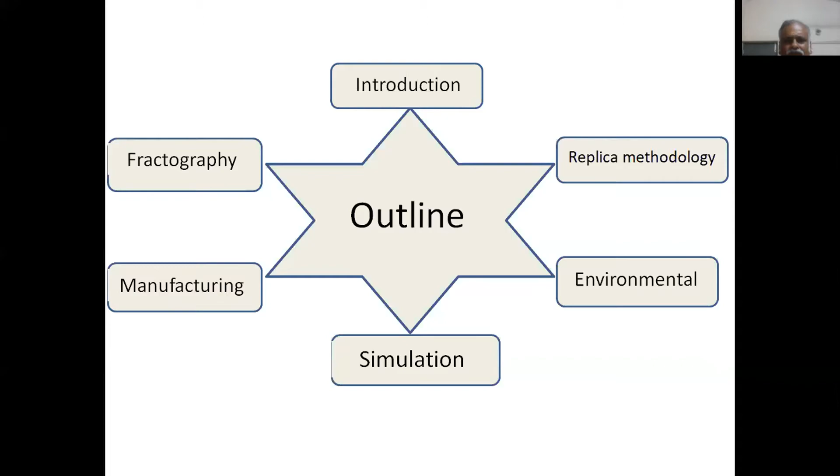Why do we study materials? We all know that material solids have a very stable form. For the time being, let us forget the other two states, liquid and gaseous. We know that solids are made of atoms, ions or molecules, which are sitting in a well-defined fixed structural arrangement in space. Therefore, we consider them solid.

However, they are not solid in that sense. They do fail. If you take a cube of glass and a cube of steel and drop them, the steel will remain intact, the glass will fail into pieces. Why does this happen? There is something that what you see with your eye cannot explain. This is the most important point.

And there lies the structural arrangement you talked about, that they are well defined. There is something there. This is because there are defects present in several dimensions in this material - right from zero dimensional, one dimensional, two dimensional, three dimensional defects present in the materials which you do not see with your eye - that is actually posing the trouble and making it fail. Many engineers do not know this, but metallurgists will appreciate it easily.

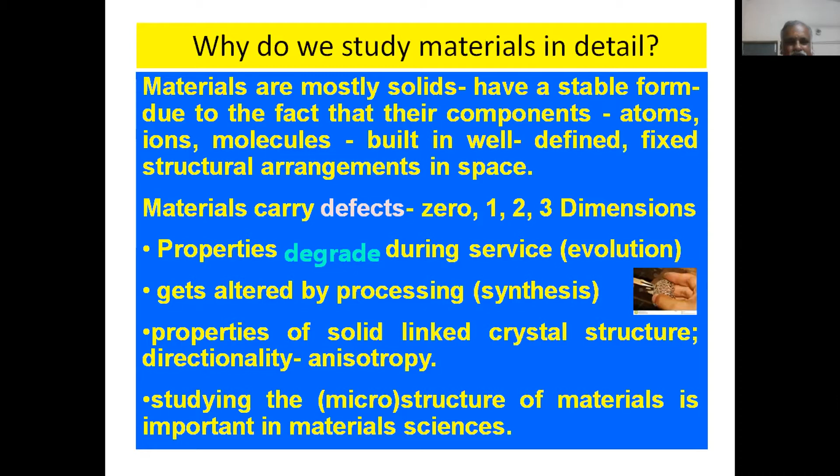Defects can be classified as zero-dimensional. An example is point defects. Metallurgists should recall that point defects are nothing but vacancies in the lattice or an interstitial atom present inside. If you take one dimension, metallurgists will immediately say dislocations, but mechanical engineers do not know this.

Then there are planar defects, which are the grain boundaries. Dr. Murthy spoke at length about casting, and these grain structures develop during solidification, forming boundaries. These are all planes, and therefore the planar boundaries are planar defects.

Volumetric defects were mentioned by previous speakers. Matthew told about inclusions, and you cannot melt steel without inclusions. Cleanliness is a word used, and metallurgy students surely can appreciate what cleanliness means. Dr. Murthy also mentioned that volumetric defects mainly are inclusions and of course voids and porosity. These two you should also remember.

Those who work in our nuclear environment appreciate a nano void, and it is very important for them because during irradiation, the material in a reactor gets a lot of point defects, generated as vacancies and interstitials. These vacancies can come together to form what is called a void, and in the void there will be some gases generated during irradiation. Therefore, void swelling is a major problem for mechanical engineers in our center. They know void swelling, but they have not seen the void; they have to see it only through a microscope.

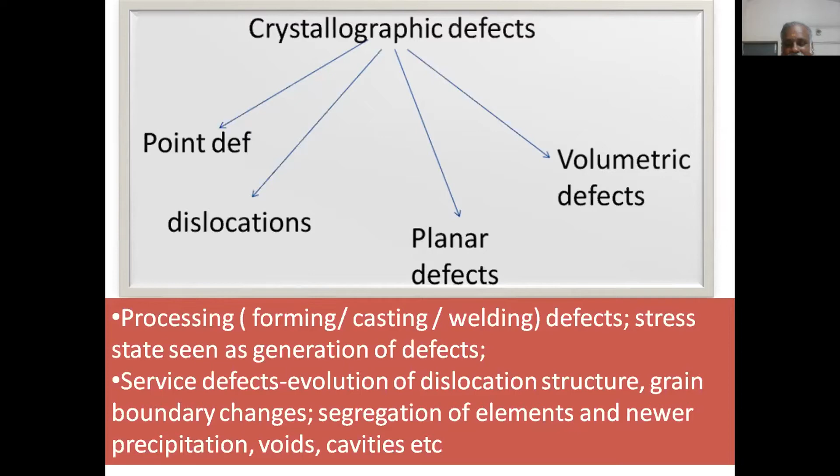Although engineers design well, and almost all components are designed very well, they fail or break because there might be an applied load they did not anticipate. As previous speakers also told, if there is a weld, there is a residual stress. Dr. Murthy called residual stress a silent killer. Yes, silently it sits inside the component, adding further stress to the applied stress, and therefore the material can give way.

Or some service factors like corrosion can cause the material to suffer stress corrosion cracking. Vibrations are another additional source of stress, and of course this is the service environment.

Look at some of the cracks which people ignore, the NDT people, even though they do an NDT scan of the weldments. The weldments are critical places in a component, and these cracks will be lying very low, and engineers will say this can be allowed as per their design permissible limit, but they will grow as a function of time and crack, as Dr. Matthew also highlighted. Forming defects, I think you would have read about in the data book, so I am not going further into detail.

As a function of time, that is evolution, local microscopic changes in composition can occur in high temperature service, particularly in an environment of 500-600 degrees, in components that serve in reactors or steam generators, where diffusion changes will make changes in the microstructure, making precipitations possible. Therefore, it will induce defects or the formation of a crack to extend further. So do not undermine the importance of microstructure, which is the theme of my talk today.

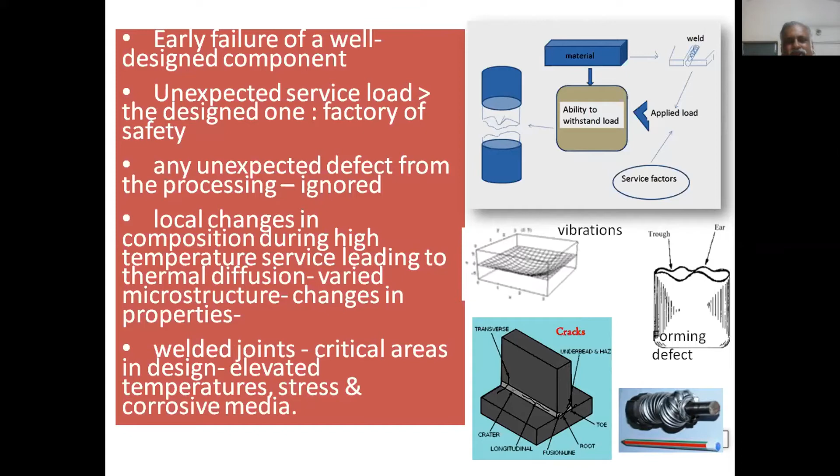Is there a possibility of R&D from failure analysis? Yes. When there are premature failures, engineers get puzzled, and sometimes catastrophic, unsafe events occur, so it is very serious. At that time, you need a systematic study of microstructure and properties, and this is what is called structure-property correlation.

This is very important for our failure analysis. So understanding properties in terms of what? Temperature, stress, radiation dose in the case of a nuclear reactor. Temperature and stress - Dr. Matthew spoke at length about low cycle fatigue and creep.

Temperature alone means what? Thermal aging. If it is stress and temperature together, it is called creep. In the case of radiation dose, it generates a large amount of defects - number of vacancies, number of interstitials are produced. So precipitation, which you may not have thought about, will occur in our reactors in an unconventional way.

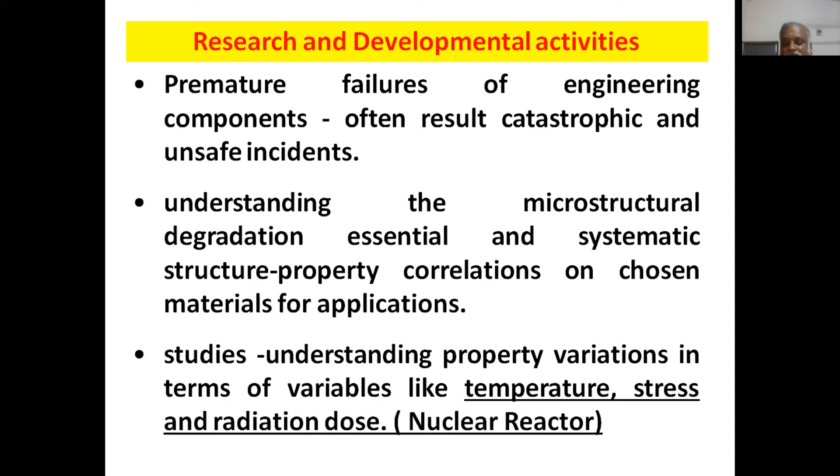Going further, today in this talk I would be touching upon a few very small components. Most of the major components, let us assume, are designed very well. Minor components may have been ignored - for example, a bellow, a tube fitting, or a manifold.

Most of the reasons have already been listed at length by Dr. Murthy. I would put as one reason the choice of material - the designer would have specified one, but it is not available, or you want a cheaper material, so you ignore it and use another variety. Let's say 316 is specified, but 304 is used instead. That's not correct. Then there are process-induced defects.

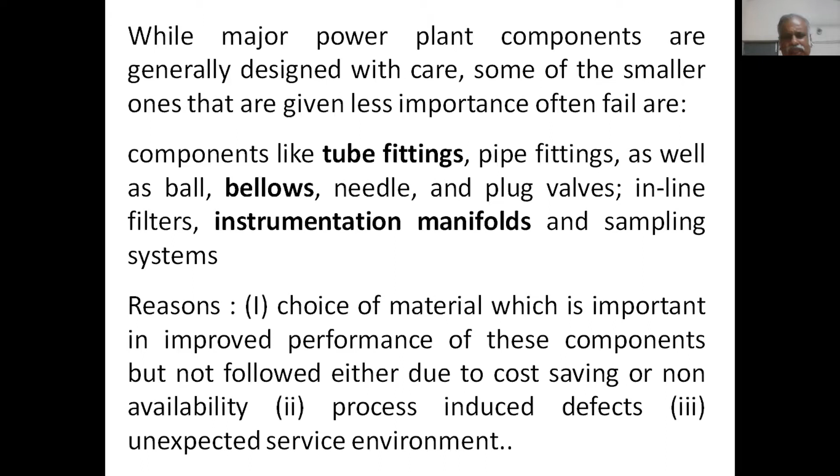During the process, there might be some defects introduced which people ignore. Unexpected service environment - that means vibrations can occur, or residual stress may be present. These things will surely affect the component. Corrosion can also affect it severely.

Let me go into the next slide to find out what failure is. There are several definitions given by previous speakers, and this slide has shown it earlier too. The main point here is that failure means cessation of linear elastic behavior. A material which behaves elastically, when deforming, will come back. If it goes into plastic deformation, it will not come back.

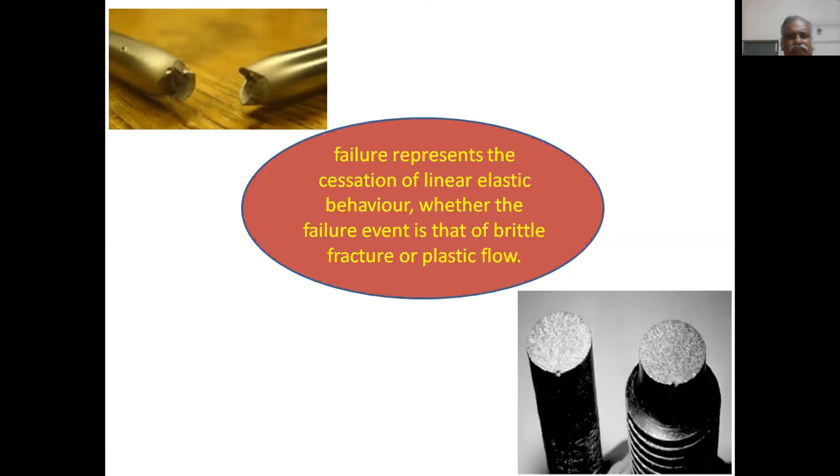Therefore, failure means - for a mechanical engineer - linear elastic behavior is very important, and this is the important thing for fracture mechanics. On the other hand, a material need not deform, but it can break into pieces like brittle fracture - that is limited plastic flow. I think Dr. Matthew had given this. So remember this important definition: cessation of linear elastic behavior is defined as failure for mechanical engineering.

Let us go into failure analysis here today. I would be employing two things - what are the tools? I think there was a chat message about this. Two important tools: fractography and metallography. I would be using these two, and these are the eyes for me to understand the failure.

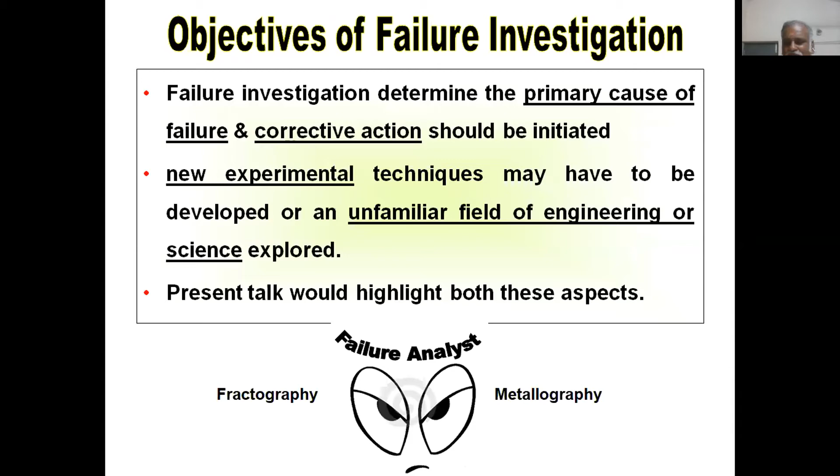Let me go further - what is fractography? How do you see that? You can look at low magnification or simply with your eye on the surface of the fracture, or use a microscope. If the component is very big, like a turbine blade, go to the site and take a plastic replica.

This method you can learn. If you are able to associate with a laboratory, like Dr. Murthy's laboratory, or Indira Gandhi Center, or NAL or DMRL, for a month or so, you can easily study a case, and the replica method can be easily understood. Using a microscope you will be able to see them, and you can section them at the backside of the fracture surface and see the metallography through optical and SEM. Therefore, cross-sectional metallography will help.

People will wonder why I'll talk only about microstructure - what is the implication on the property? The only important property for people like us is micro hardness. Although there are a variety of other properties like tensile and others, you can measure micro hardness or hardness, and this will give you an idea about toughness and also about strength.

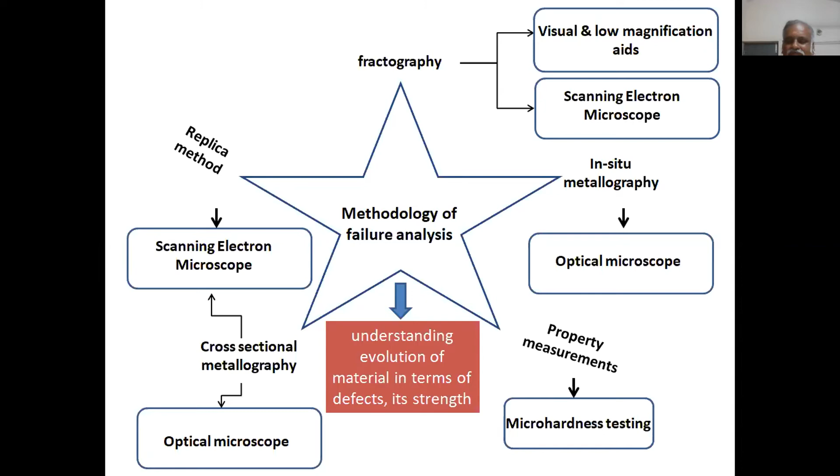So very quickly you can get to know the properties around the vein region, and what kind of microstructure it is - whether it is the same as the distant area, or similar or different. Once you establish these things, the cause can be understood.

For example, I talked about defects - this is a valve stem. On the left side you have seen a stainless steel valve stem, highly deformed. What are the signatures? You can see different signatures. One interesting signature - the very parallel lines - suggests that this supports severe deformation twins, and slip bands are also there.

They are interspersed along with this - so twinning as well as deformation by slip. Slip is very common for stainless steel, but twinning indicates that high energy deformation has also occurred. This is one suggestion you get, and these are all two-dimensional defects that are generated. If you look at a stainless steel that is deformed, you can see beautiful dislocations - one-dimensional dislocations. This is a transmission electron microscope picture.

You see the dislocation is random, whereas in this band it is all arranged. Along this band you find a large amount of dislocations, and dislocations from here can interact with each other and get into a confused state, giving what is called a debris of dislocations.

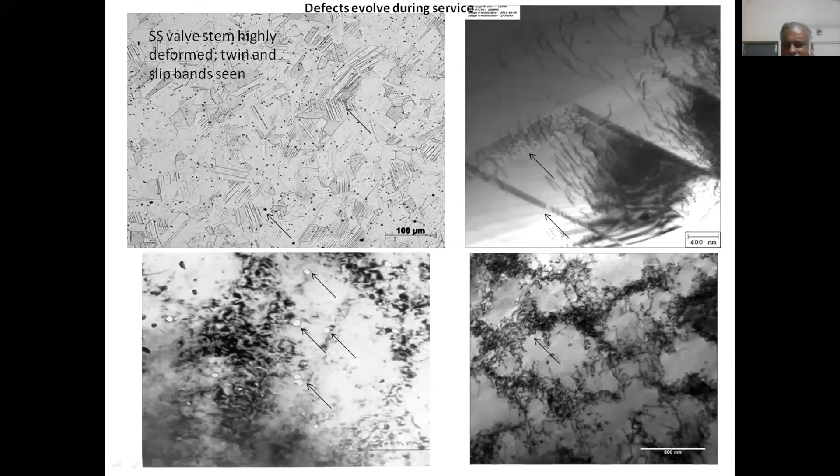On the right corner you find dislocations form what is called a cell arrangement. This is the formation of dislocations when, to reduce their energy, they try to form a network like this so they can stabilize themselves. This is a case study from a low cycle fatigue sample where I could see the dislocations rearranging into cells.

If you look at the left side, this is a reactor component, a stainless steel component which has served very well but got exposed to irradiation. Irradiation basically generates vacancies and interstitials, and the vacancies agglomerate over time, evolving into voids. I can show you these nano voids, which can be seen only in TEM.

These white dots are basically voids. How do you say it is voids? A person who has worked in a transmission electron microscope knows that electrons travel through the sample. If scattered, the image becomes dark; if they pass through, it becomes white. So dislocations get scattered and appear dark in the previous pictures, but here the round ones are voids, which allow electrons to pass through, making the image white. That is how you distinguish them.

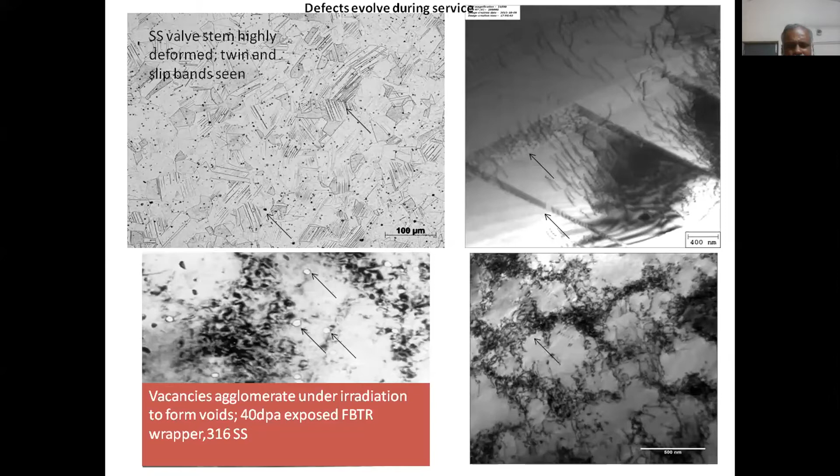Okay, let me go into the next one.

This is a classic example of grain boundary migration in a creep-exposed sample, as Dr. Matthew was speaking about. This sample served for 30 years in a reactor environment. When it came to me for failure analysis, I could see a number of precipitates around the grain boundary, a triple point, and several precipitates that had fallen. Actually, the grain boundary has migrated here. This is what is called grain boundary migration due to creep.

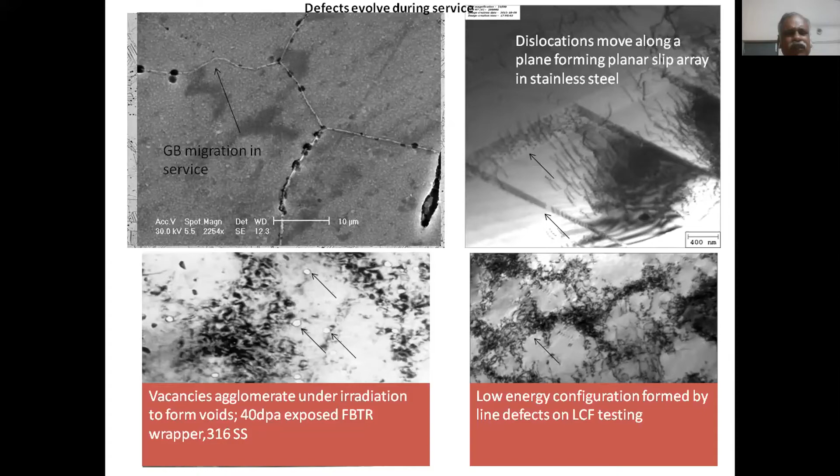All these things you can understand if you have a very good eye for microstructure. Now let me go through these case studies.

Let us first have a case study by fractography, that is, seeing only the fracture surface. People who spoke before me talked about ductile failure and brittle failure. What is the difference? Cup and cone for ductile, as Dr. Matthew told, but brittle failure is shiny. The light gets reflected and it will be flat.

What is so important about ductile failure? Take a turbine blade as an example: if it extends even by a fraction of an inch, that is sufficient for it to touch the surface of the dome. So if the material elongates, it limits the service life. That's why turbine blades are designed for about 1% strain. So you should specify certain important properties, like ductility, for a case such as the turbine blade.

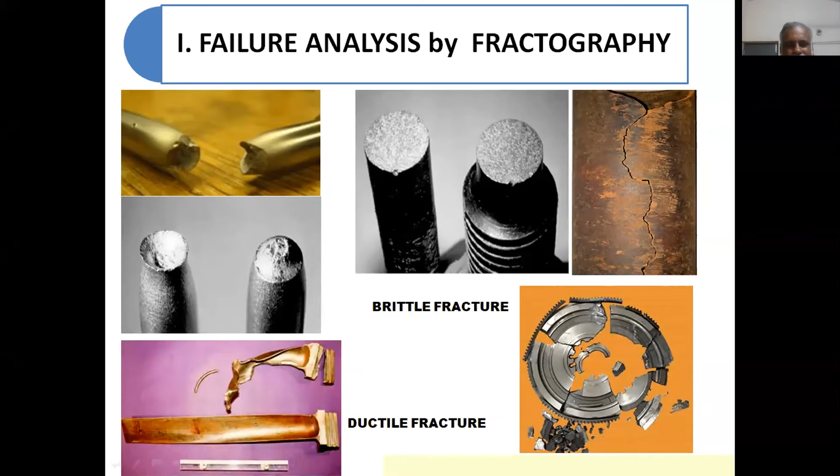Let me go into the case study with the given samples. This was basically an extrusion. On the left side I have marked region 1 and region 2; this was cold extruded or forged. When driven through a die, it came out in pieces like a crocodile mouth. If you look carefully with the naked eye, you can see some signatures on the right corner down here, these lines.

A good fractography person will understand that this is basically a brittle failure. The shininess on the surface, plus the lines, suggest it is a chevron or V-type pattern, meaning it has failed by brittle nature.

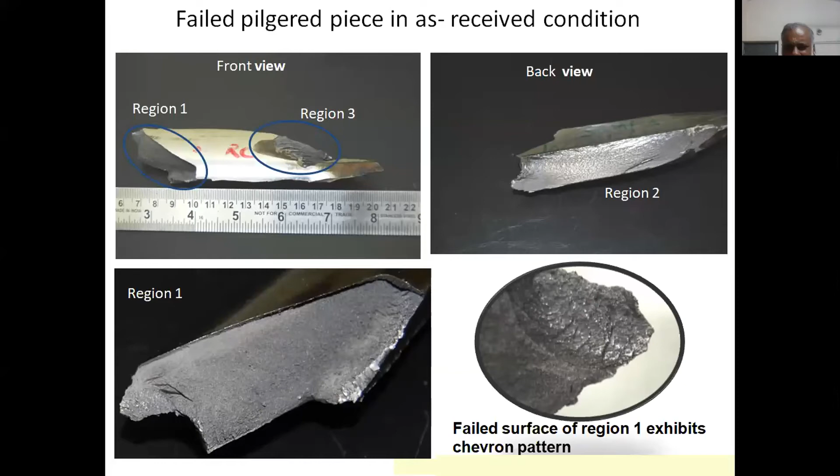If you put it under the microscope, the fracture surface exhibits beautiful grains. I have not done anything to this, but you can see beautiful grains, and the grains are elongated and oriented. That means it has suffered some deformation, and all the grains are flat.

Certain grains exhibit slight differences, some small regions where something is present. In order to understand what is happening, I increased the magnification from 80x to around 300x. You can see that certain grains are flat, but certain grains contain some amount of deformation, suggesting that a little bit of deformation has occurred, plus grains are flat and cleaved away.

So this is what they have used a term called cleavage. Cleavage facets are seen, and Dr. Matthew mentioned inclusion. See the beautiful inclusion sitting here, at the corner of the grains. They allow the material to give away like a pancake, and it comes out as brittleness with very limited ductility.

I also mentioned fractography and cross-sectional metallography. Beneath you have two pictures exhibiting the cross-sectional metallography. What is cross-section? Very close to the fracture surface. Slice it, polish it, etch it, like what you do in your metallography laboratory. You will see under the microscope beautiful grains, and the grains are decorated along the grain boundary with a lot of precipitation.

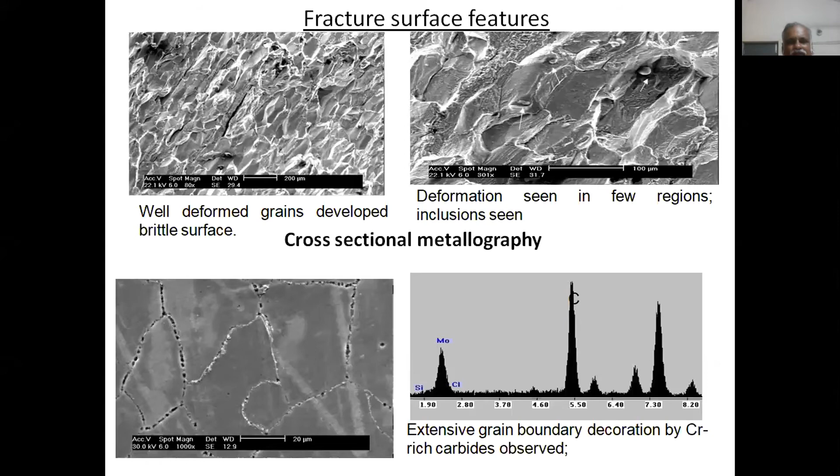Now I would go into the second case study, where metallography has helped to understand a failure of wire rope. An aerial wire rope is employed in our heavy water plant to transport coal from Singareni to Manuguru. This is supposed to serve for 6 continuous years with regular maintenance. Then the rope has been working nicely.

But however, every month there is a breakage. So there is a consideration, because the tons of coal being transported along this rope for 9 kilometers across the highway is causing danger to the people who are traveling. Therefore, a serious concern was raised and the failed parts were given to our center.

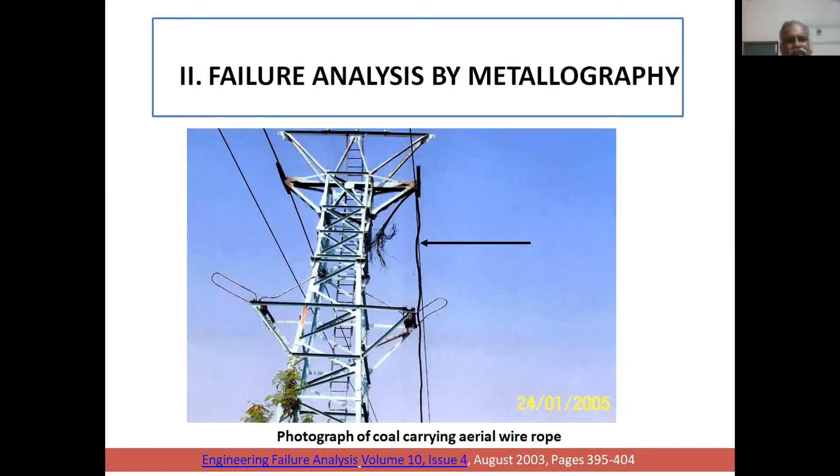The rope is basically 64 millimeter diameter and consists of several rounds of fine round wires cross-section wise, and the last 2 outer sets are basically locked coil wire in the form of a Z shape, so that they can lock each other and therefore be tight. But it is this Z-shape cross-section wire which is actually failing.

How is it failing? It comes out. When it comes out, the bucket which travels will get stopped, and after some time it tumbles down and it is dangerous. So therefore, we were given this failed piece.

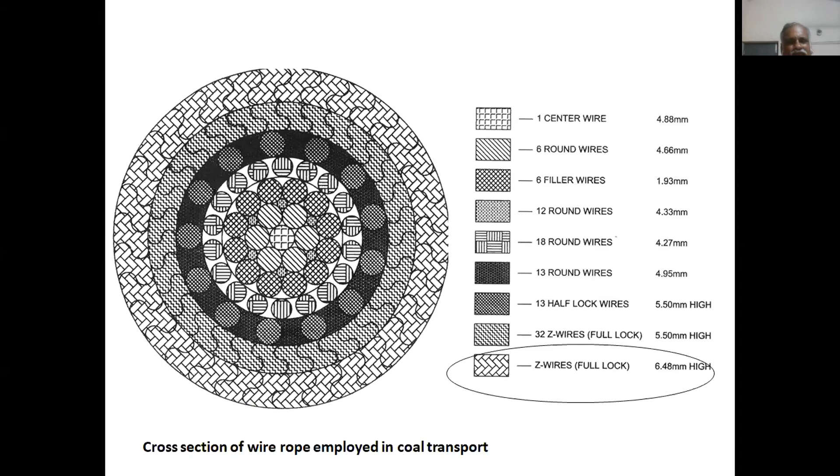If you look at the cross section of the Z wire, it's basically 0.7% steel. You know, 0.8% carbon is 100% pearlite. For 0.7, calculate 0.8 minus 0.7 divided by 0.7, which is about 1/7. That 1/7 will be ferrite presence. So you find that it should be 1/7 ferrite stringers with pearlite and other things, or 6 by 7.

But if you look at the edges, you find the structure is different. Microstructurally, the probe exhibits on the outer edge, up to about 25 microns, a different structure. I have shown the micron here and you can see the width measured. The structure is around 50-50, that is 50% ferrite, 50% pearlite. That means it is 0.4% steel.

But basically, this is heat treated, and instead of 0.7% here, the edges have got removed of its carbon. What is it called? Metallurgists will immediately say it is decarburization. If decarburization is present, you will lose the carbon. If there is a carburizing environment, then it will become carburized. But this clearly shows that decarburization has happened.

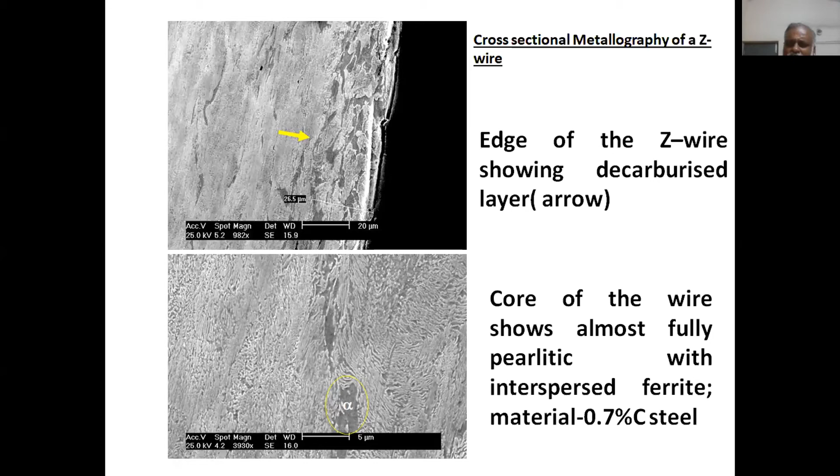So I have further continued and shown the mechanical properties, how it is. You can see clearly that a hardness map across the thickness clearly shows that the edges exhibit 200 VHN compared to the core, which is basically around 400 VHN. Correct? So that means what?

The decarburized layer, as any metallurgist can appreciate, is basically a soft zone compared to the core. Is it good? The American Association for Wire Rope accepts this, but we argue that it is not good for us.

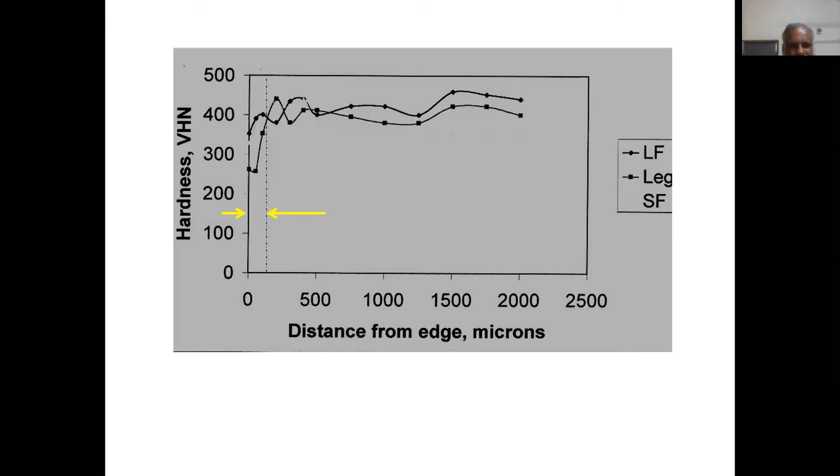How? It's very simple. The buckets move, there are about 300 buckets, and a particular zone is decarbonized. That wire gets hit every 20 seconds. One bucket moves, and that 300 ton load, when it sits, it gets deformed. This deformed pearlite will get work hardened as a function of time, and we could see that the hardness of the edges goes high, becomes brittle, and breaks over a period of time. This is what we argued.

Then they argued how it is possible. The wire gets decarbonized when it is heat treated after manufacture. So what is the atmosphere in the furnace? The atmosphere is basically generated from propane gas, which when fired converts into CO and CO2, whose proportion determines whether it is carburizing or decarburizing.

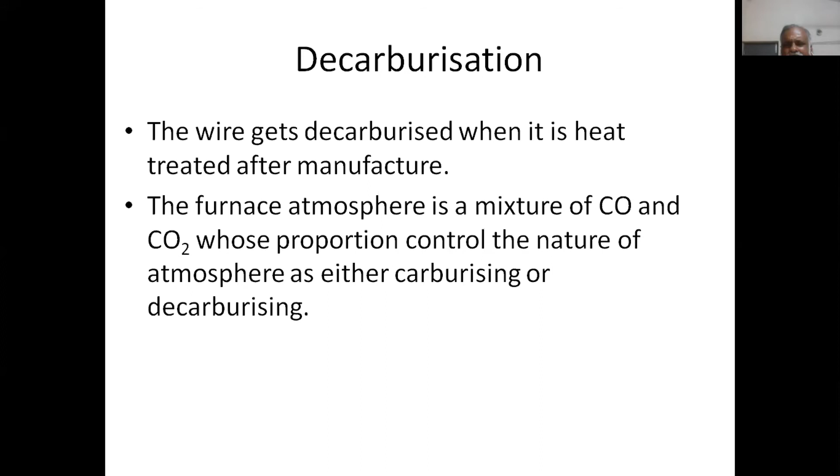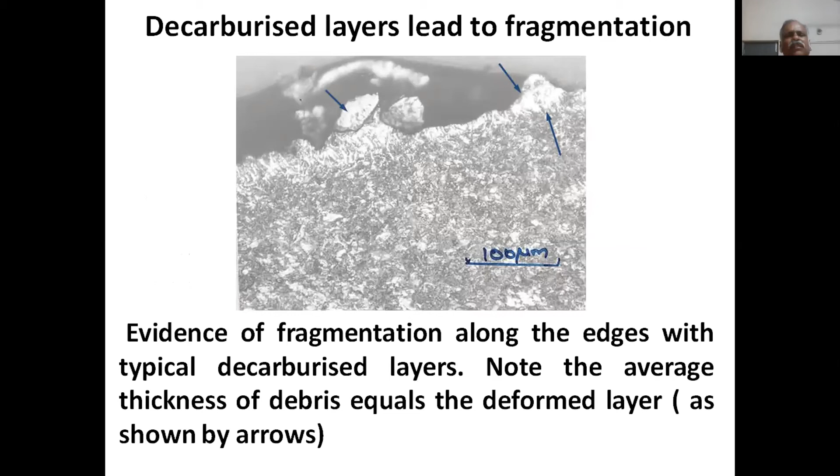In fact, the decarburized surface has become hardened, as I have shown in this microstructure. My argument is the fragmentation along the edges clearly shows that the decarbonized layer has been hit again and again by the 300 buckets every 20 seconds, leading to a deformed layer becoming very hardened, and hence losing its ductility. So decarbonization should not be permitted. This is how I argued.

That CO and CO2 combination, how it should be, is very nicely portrayed in good books of metallurgy. You can go through that, and whatever I have spoken is available in Engineering Failure Analysis as a paper. Okay, for want of time, I will move further.

The second one is where solid interacts with liquid and gas, and this is why environment plays a part. In our case, sodium and water are both present, and they travel. Water travels in the form of steam, and sodium is hot liquid. Okay, and how this interacts and what kind of failures occur.

One is caustic embrittlement. This is a form of stress corrosion cracking. Several other corrosion methods like stress corrosion cracking, pitting, hydrogen embrittlement are all possible in our environment. For example, steam, chlorine, hydrogen are possible causes.

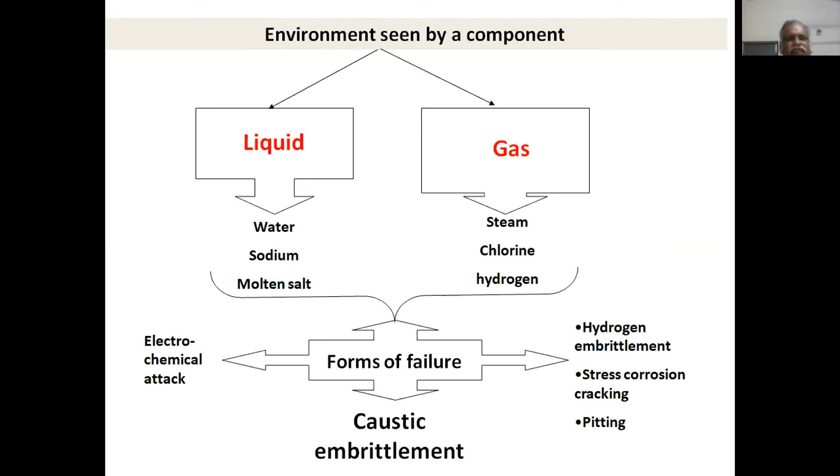So I would try to touch upon two case studies and close. The most critical component in our sodium systems, the liquid sodium system, is the bellows.

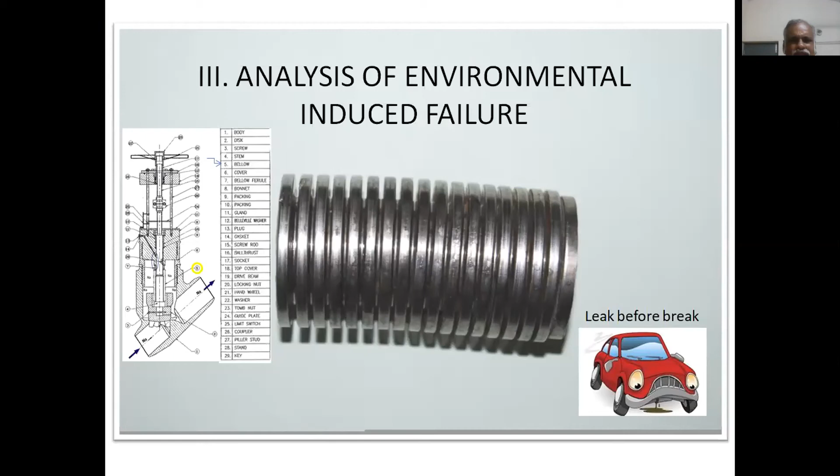When the bellows develop a small leak, we have to shut down and take it out. Once it has leaked, the material has been lost, and it is very difficult to understand how the leak has occurred. We have to carefully see. In this case, I have given a bellow. The bellow consists of two ply material, two sheets, in a folded construction.

I could see that it has given away and opened out for a 3 millimeter or 2 millimeter hole, and one lip alone was there. There are some interesting discussions. If you look very carefully in detail at this fracture surface, around 1000x magnification, it shows some lines, a beautiful set of lines. Further magnified, you could see beautiful striations in addition to a twin here.

So that means there is some kind of interaction which is exothermic in nature. All of you know from 12th standard that sodium, when it interacts with water, is exothermic. In fact, sodium is liquid by 90 degrees Celsius, and when steam interacts, sodium plus steam will generate a huge amount of heat, and it can reach 800 degrees in no time.

This will generate and open out a very fine thin bellow material, and if a defect is present, it will open out, and through that interaction causes Wallner lines, which are basically microscopic lines. In detail, if you look at it, you find development of twin bands along with a lot of striations, suggesting there is also a fatigue effect caused by the interactions.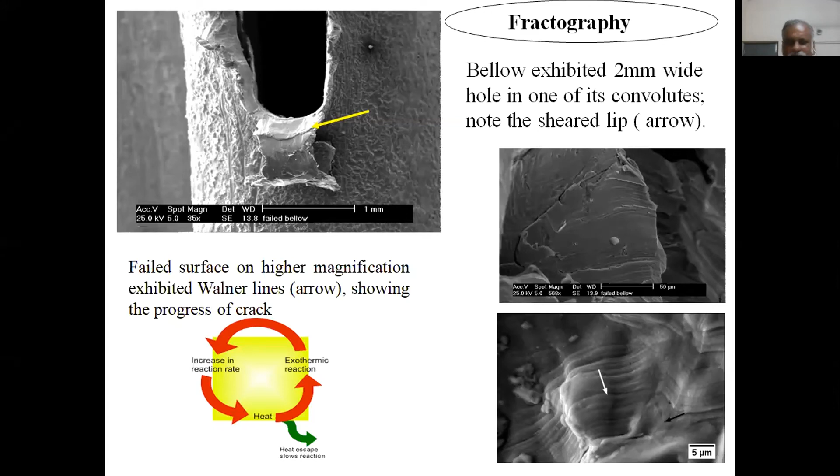What could be the reason why this has developed? It has been a leakage. So we tried to see between the two plies through fractography. The two plies carrying the sodium debris exhibit an interesting microstructure. People working in stainless steel will know that this is sensitization.

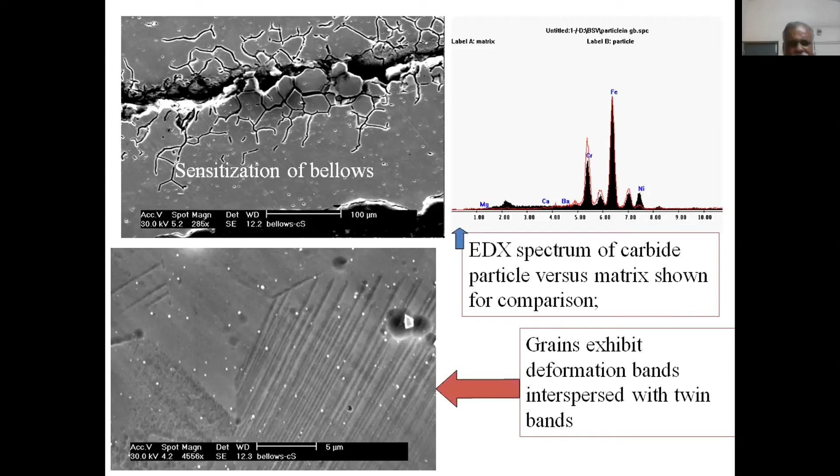Let me go into a similar thing, which is again a simulation work. With this I would close. Our mechanical engineers wanted to understand this failure. They allowed steam to pass through a steam generator tube, and they provided a small hole in the steam generator tube.

Unfortunately, this rupture disc failed not like a petal but as a linear crack. So they wondered why it cracked along a line. They wanted to know the reason, and we examined it in detail. In the next few slides I will tell you what has been the reason why a linear crack has emerged. With that, I will close.

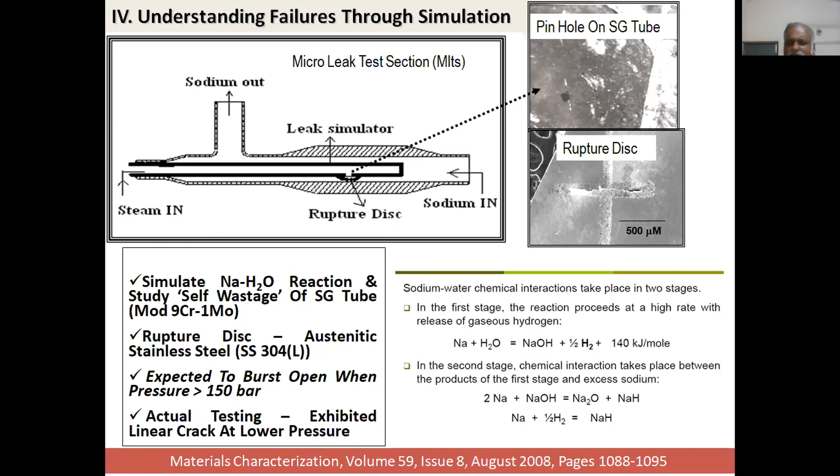The starting material is very simple: 10 to 12 micron grain size, very good austenitic stainless steel. No signatures of deformation, hardness 220 VHN, a typical microstructure of austenitic stainless steel. Grains are very fine prior to testing.

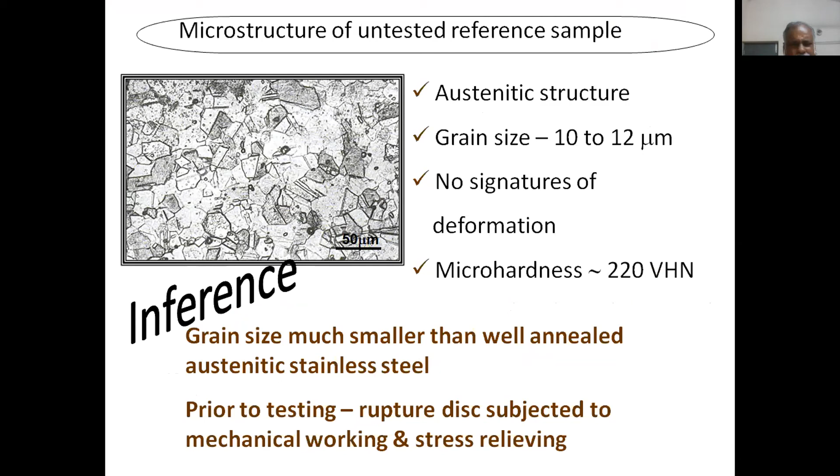Mechanical rupture test was done, subject to mechanical things, everything has been done. The piece which was given to me after testing, we examined on two sides. The inner surface exhibits a linear crack. On the outer side you could see the plus mark, and you could see debris thrown out, white debris on either side, a 700 micron long crack, debris thrown around up to 500 to 600 microns, and we examined the microstructure in detail of these two discs on either side.

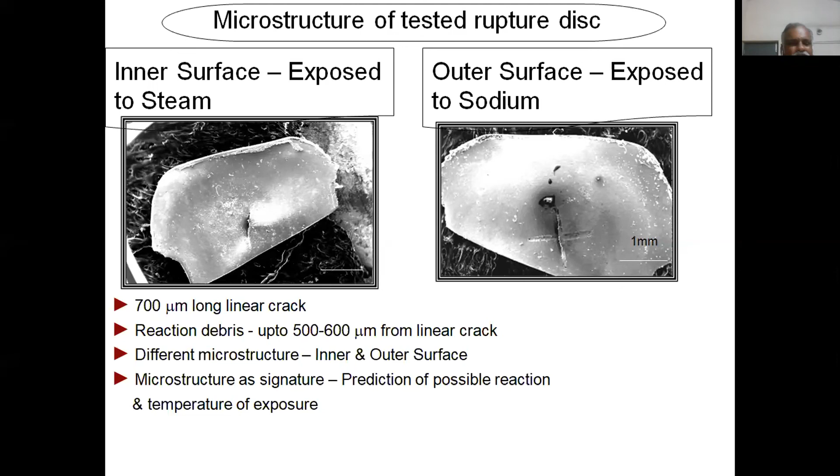We could see what could be the microstructure evolution as a function of exposure to the possible reaction of sodium and steam. If you look at the edge, it contained debris of sodium oxide, and there is also the edge exhibiting incipient melting condition, and at a distance around 250 microns, lots of decoration of the grain boundaries. Here, if you look at it, the grains which I have not etched, as such the heat has etched it, have a good amount of micro cracks. So these are all the information.

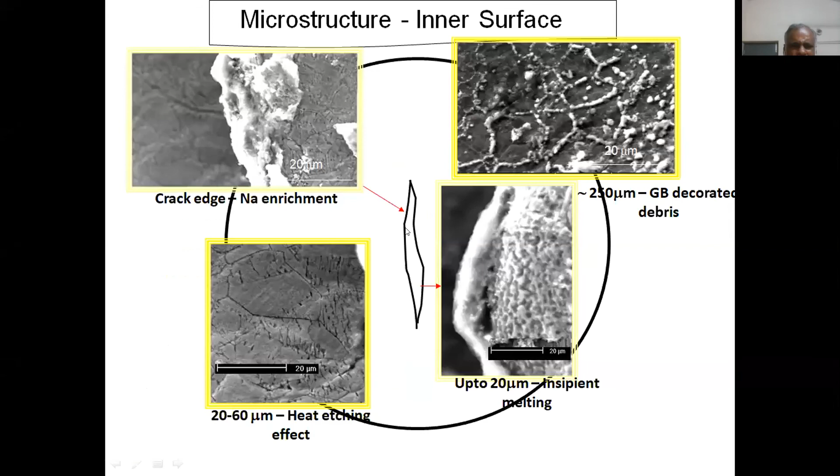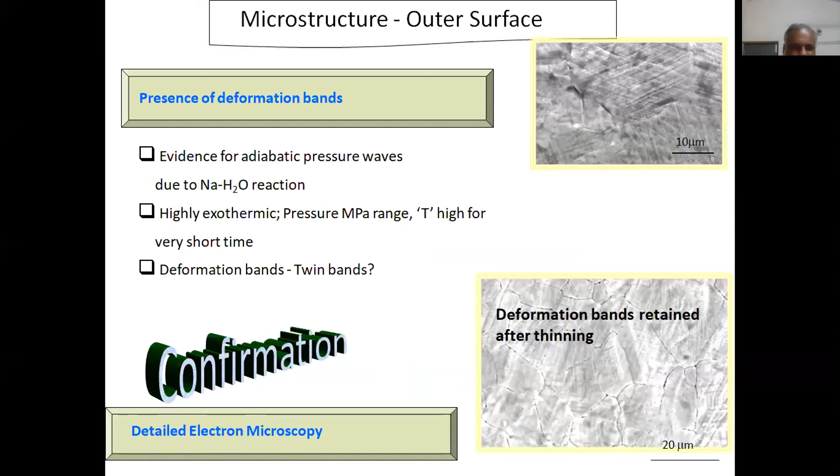Now in order to understand why such bands are formed, we try to understand it at the SEM level. You could see something like this, and bands are there. Whether these are all simple deformation bands or due to twinning - we know already that possibly high temperature, high pressure, both might have happened. So whether deformation bands are due to twinning also, a detailed electron microscopy was done.

You could see the parallel bamboo-like twin bands beautifully seen at the edges. This is the edge. You could see that the deformation bands are nothing but twinning bands. That means twinning has dominated extensively because of the high temperature and pressure generated by the sodium-steam interaction. We look on the right side as well as beneath, the debris of dislocation.

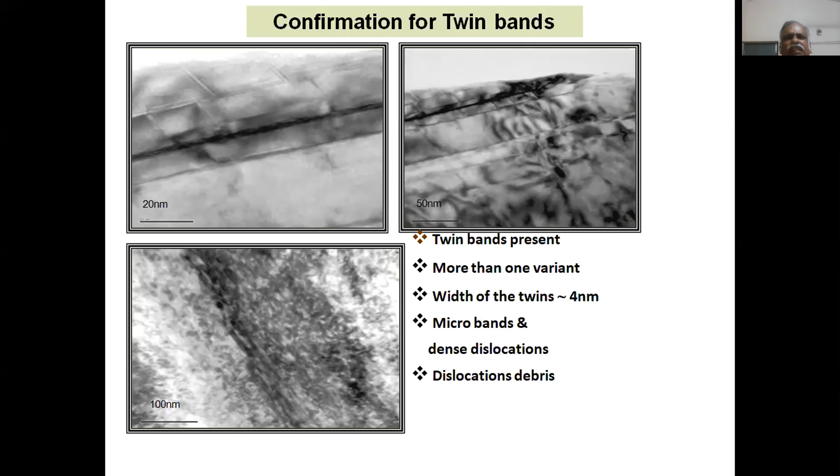The kind of dislocation which I showed earlier as example is quite different from this debris. This debris is very severely interlocked, and therefore the dense dislocation formation, this debris formation, suggests that the reaction rate, the deformation rate, is very fast.

So with this I will try to conclude saying that microstructure is very important, and what you do not see with your eyes can be seen through the microstructure. With the help of microstructure, a fracture surface study will reveal certain details. The cross-sectional metallography will reveal certain microstructure evolution in terms of the precipitation, in terms of the dislocation structure, in terms of the bands, deformation bands, etc.

I had provided three case studies. One is the monthly recurring failure of wire rope, and I showed how decarburization is the cause. I also showed HIC sensitization of the material, which can cause a failure, and failure simulation done by our mechanical engineers, why the failure has occurred, the crack has been a linear crack.

So microstructure can easily give an answer to the failures, and in these few words, I also appreciate the efforts of the Kottayam chapter in making